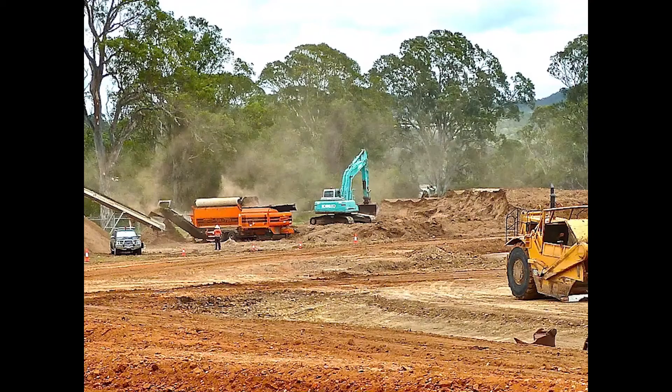But we have dramatically altered our surroundings through our use and abuse of natural resources. These changes have profoundly negative impacts, both short and long term, on our health and well-being. The extraction of raw materials from the subsoil, deforestation, greenhouse gas emissions, and the consumption of fresh water cannot follow economic development hand in hand.

However, as current society is not ready to stop growth, the answer to sustainable development can only come through the so-called decoupling process. This means that, through the use of technologies already available today, it is necessary to decouple the use of natural resources from economic growth. The two aspects of decoupling:

Resource decoupling refers to reducing the rate of resource use per unit of economic activity. Dematerialization is based on using less material, energy, water and land resources for the same economic output. Impact decoupling requires increasing economic output while reducing negative environmental impacts.

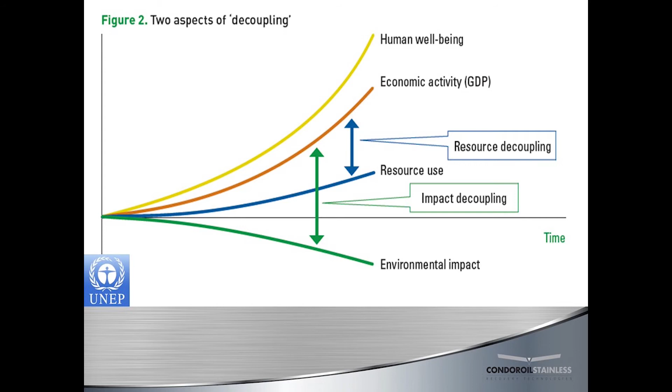If we consider an industrial complex in metal surface treatment, we see that polluted water is generally managed by a wastewater treatment plant. Sludge goes to the dump while purified water goes into the rivers.

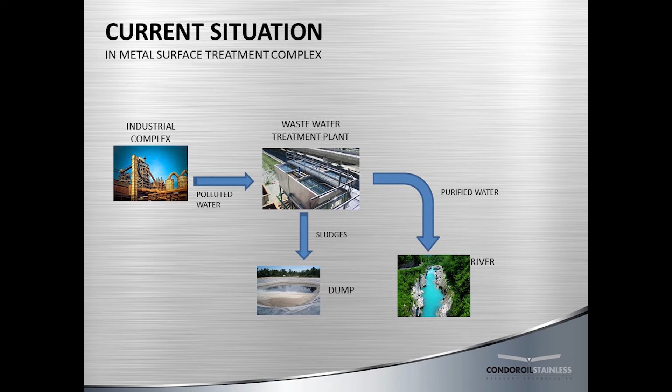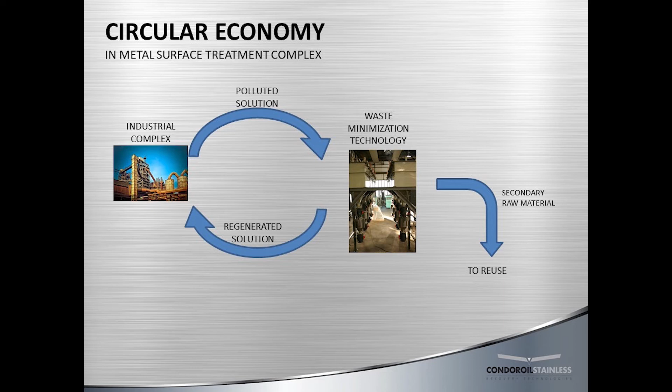In the case of circular economy, the polluted solutions, thanks to waste minimization technologies, are no longer dumped, but regenerated and sent back to production, while the secondary raw materials produced by the process are reused.

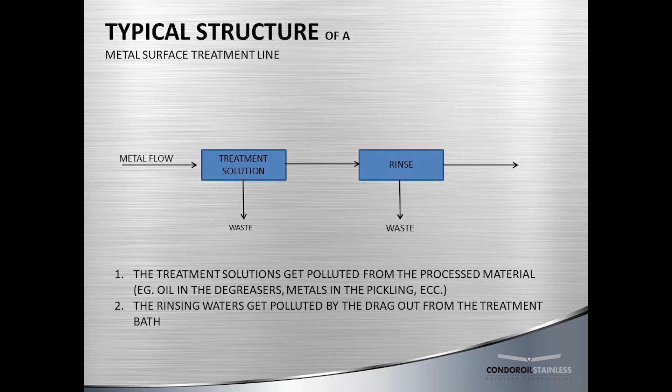This is a typical structure of a metal surface treatment line where both the treatment solution and rinse water get contaminated during the process. The ideal structure to manage the waste is regeneration of the working bath by recovering the chemicals and the water, concentrating to recover chemical drag-out and produce demi-water. As you can see from the table, everything is reused with no more creation of waste.

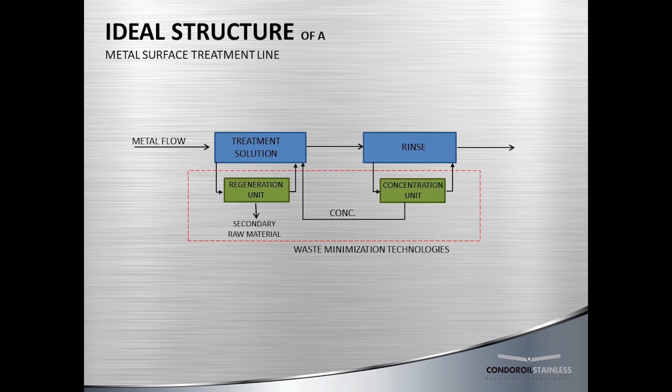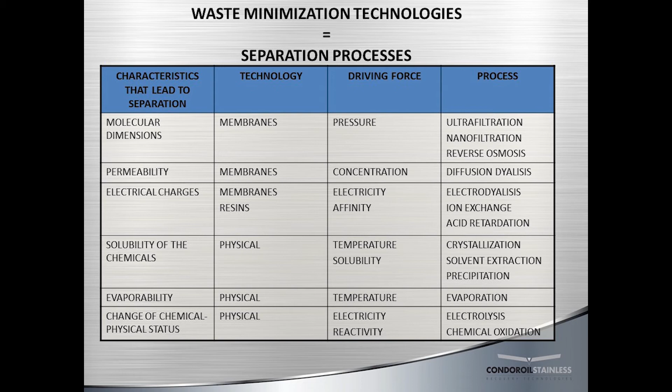Condoroil Stainless offers waste minimization technologies using separation processes. According to the need, a different technology using a different driving force is applied. This leads to the choice of the most suitable separation process.

And now some examples of what Condoroil Stainless can offer as circular economy in stainless steel pickling. As you will see, with current technologies it is today possible to reach the goals of zero discharge and total resource recovery.

In order to reach the goals, several steps have to be considered. Step 1 consists in the reconcentration of the solution drag-out using a reverse osmosis unit. The concentrated solution is recovered in the pickling tanks while the purified water is recycled in the rinsing steps.

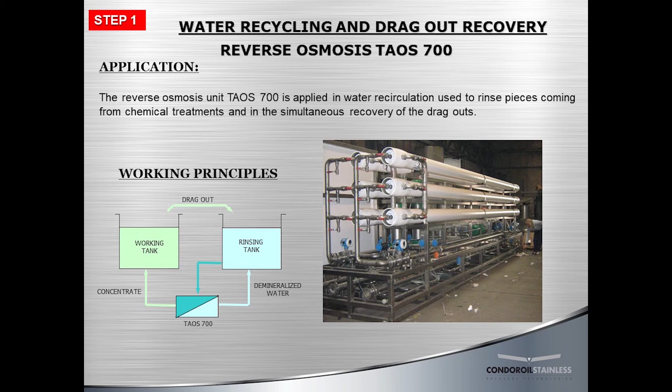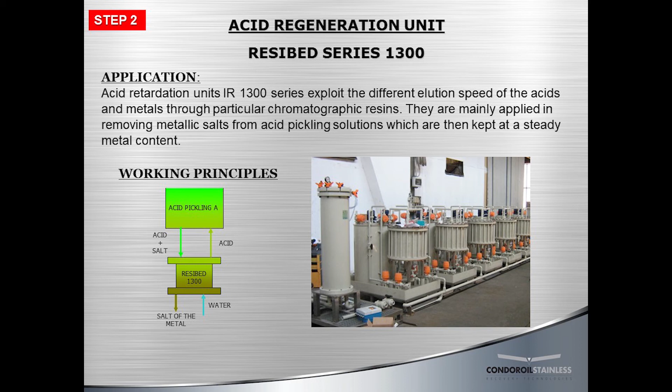Step 2 consists in the recovery of the free acids from the pickling solution. Using an acid retardation unit, it is possible to separate the metal salts, which are dumped, from the good acids that are recovered. Step 3 is finally used to recover acids and metal scrap from the salt stream coming from the acid regeneration unit.

Using an electrodialysis unit, it is possible to separate the salts, producing metal scraps, which are recycled in the melting shop, and free acids, which are recovered in the pickling solution.

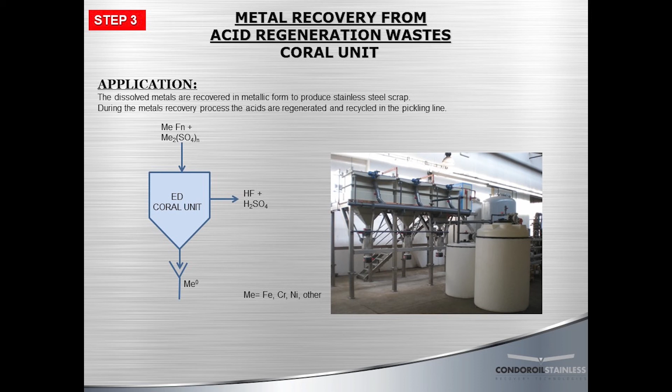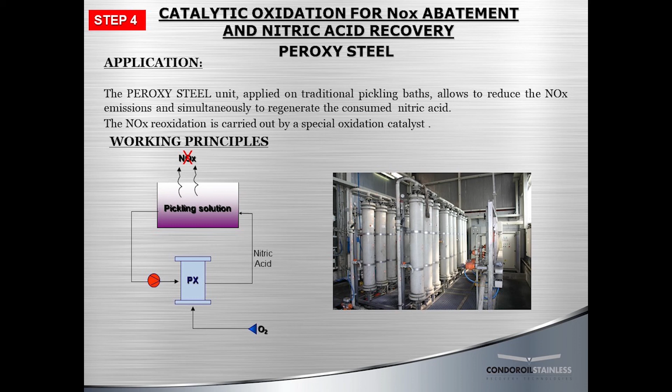Step 4 consists in the recovery of nitric acid from the nitrogen oxide gases. The reoxidation unit applied on traditional pickling baths allows reduction of NOx emissions and simultaneously regenerates the consumed nitric acid. The NOx reoxidation is carried out by a special oxidation catalyst using simple oxygen from the air.

And to conclude, a closed-loop cycle in managing a stainless steel pickling plant. The pickling solution is sent to Resibed, where acids are regenerated and come back to the pickling tank, while salts are sent to the Coral unit, where metal scraps are produced and further acid recovery occurs.

In the case of traditional pickling based on nitric acid, the Peroxysteel unit reduces NOx emissions and regenerates nitric acid, which is reused in the pickling tanks.

As far as rinse water is concerned, with the Taos unit, chemical drag-outs are reconcentrated and sent back to the pickling unit, while demi-water is produced and recycled to the demi-rinse tank, and by overflow, back to the rinse tank.

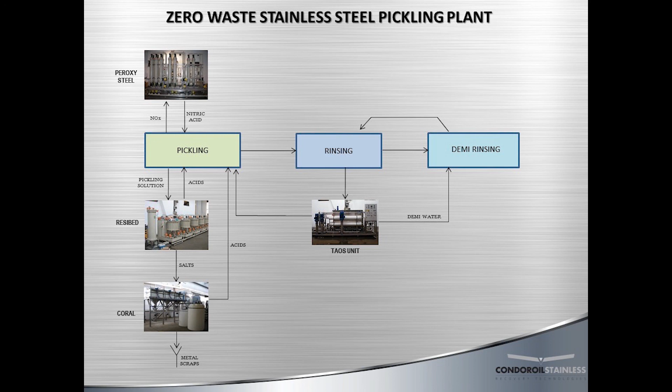No more waste has to be disposed of. We have reached zero discharge.